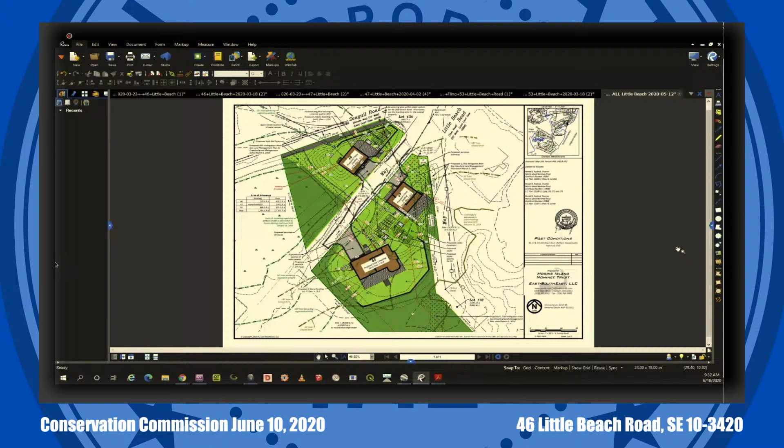So the proposal with 46 is to elevate the structure. We are pulling a little bit away from the vegetated wetland. Underneath the building, we are taking advantage of the space and putting in a garage, which will be a prime location for refuse, the equipment that can be stored within.

We're proposing a deck located to the east of the property, away from the wetland. There'll be a new Title V septic system that better meets the requirements. And there will be mitigation that is equivalent to the 2-to-1 requirements.

Looking at 47, this was a bit more difficult of a lot because 47 is extremely small. The current building actually exists over the property line. We're pulling it back onto the property, just barely.

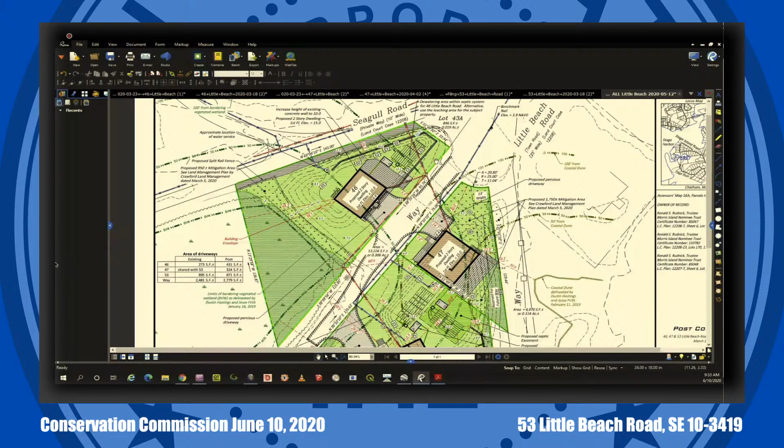We're choosing to mitigate in front of the property because there's really no room on the other sides. That's where the septic system currently exists, but we're going to put an easement on the 53 lot for that septic system so that it's in the best location possible.

With 53, this is the largest lot. This does go out to the water. Again, proposing to elevate the garage underneath, the septic system that is higher, therefore better.

This mitigation is coming in the form of a land management plan. It's removal of black pine and knotweed. And then going back into the middle, we are shifting the driveway over as far as we can away from that BVW. That will all be pervious surface, and all the grading is established to keep the water away from the wetland.

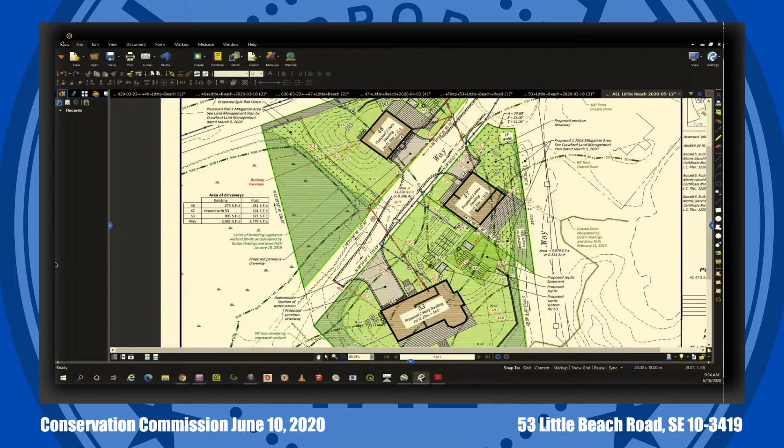As mentioned, the numbers, we're reducing lawn and reducing non-native invasives in order to make up for the slight increases in coverage. FEMA compliant foundations, which is a bit better than the current foundations that exist today. The decks would be open and as pervious as open decks can be. And if there are any questions, I'd be happy to answer them.

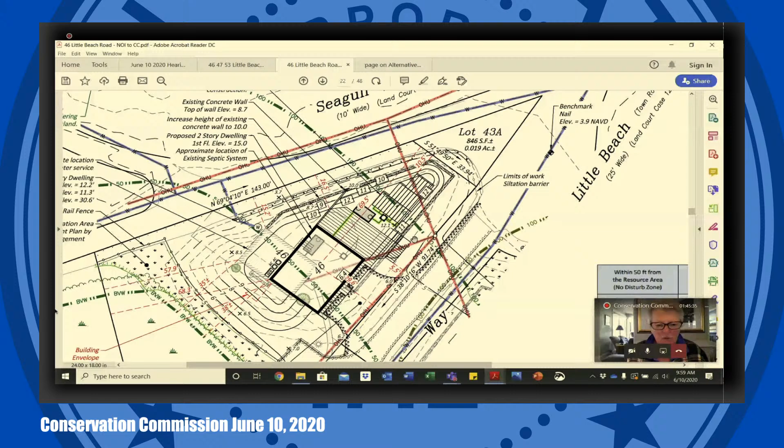The green area around the dwelling, that's just basically Cape Cod lawn? Yes.

The AC units are showing as being in the no disturb zone. Is there any reason they can't be moved to the other side of the dwelling to get them out of the NDZ? They are in the NDZ, and they're also elevated. Those have to meet the same requirements as the building, so we need those AC units and the generator up at elevation 14, or at least 4 feet above the ground.

Is it possible to move the AC units and their elevated position to this side? Yeah, anywhere along there, just to improve the no disturb zone, which is already disturbed, I know, but...

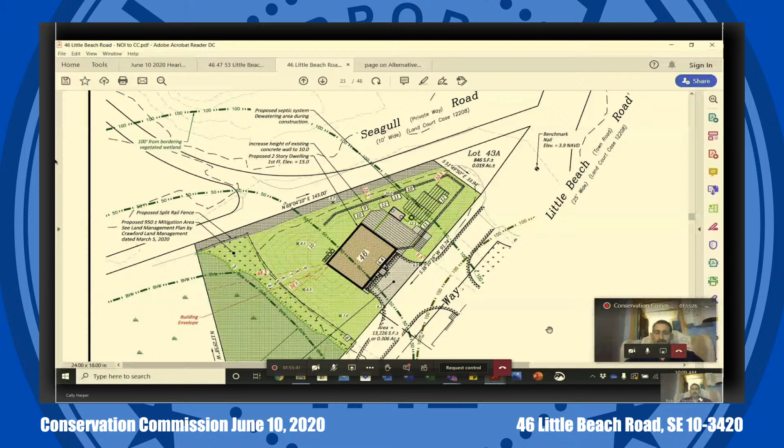I have a question about the proposed mitigation. So the proposal is to treat and remove all invasives, likely invasives, and non-native plant species from the property. My question is, does that include the portion of the isolated wetland that is on site? And how would you propose to do that, to work in the wetland on only a portion of it and leave the rest?

This is Jen Crawford from Crawford Land Management. The answer is yes, we would propose to manage those species in the portion of the wetland that is on the property, and you'll see on the plan that the property line goes through the wetland, through the majority of the wetland on the property. I recognize my labels, hatches, and legend are flip-flopped, but when you're looking at the plan, the grass symbol where it says low wetland vegetation, really the only thing in there is purple loosestrife, which is very easy to manage.

There are more invasive species around the edge of the wetland in that mixed shrub border - everything from shrub honeysuckle and bittersweet, but it's also mixed in with baccharis and a bunch of Rosa palustris, swamp rose, and some good things in there. So it should be pretty easy to just go through those areas and clip and drip anything that doesn't belong.

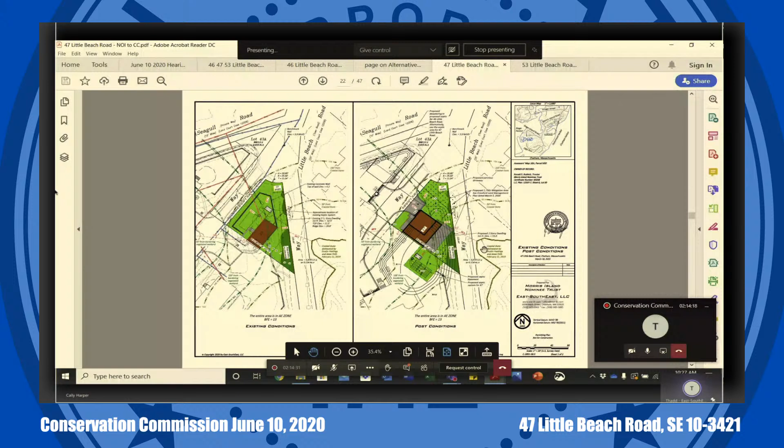Okay, so to the east of 47. Right, that was a way established as a means to the water. And just to share, Morris Island Road used to go through here. This was the way to Morris Island Road.

They now have a 20-foot wide way there that contains the path, which is of benefit to everyone in the neighborhood to get out to the water. They had reserved a 13-foot strip for a future way, and we are proposing deck and stairs within that, with the risk that should they ever improve this to be a formal road going out to the water, they will have to remove that. But getting approval to have a formal way, anything more than the 4-foot wide path they currently have, is slim to none.

So who's responsible for maintaining whatever is planted there or any other activity in the way? What entity controls the way? I don't know how else to ask the question because I don't understand.

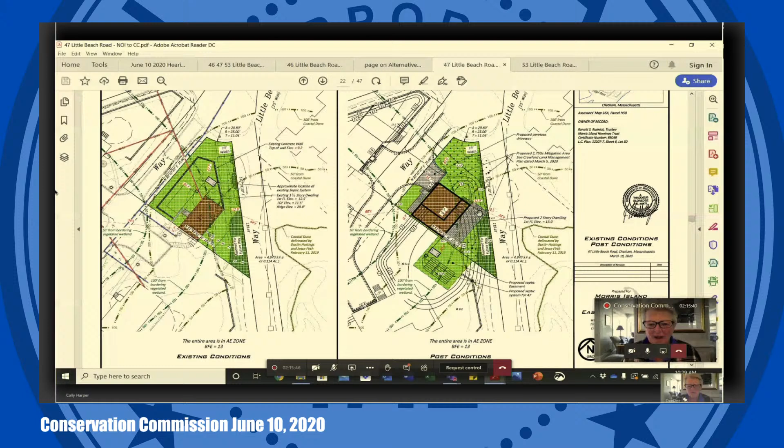It's a private way that a number of people have rights in. Under derelict fee, half the ownership would be under the applicant, and the other half would be under Mr. Eaton and company. But responsibility? Excuse me, Madam Chair, I think that's wrong about the ownership. Oh, my mistake.

We have a derelict fee statute. So when ways are created on a plan, the adjoining property owners go to the middle line of the property. So the Eaton property, which is on the other side of the way, would own to the middle line, own the fee to the middle line, subject to the rights of all persons to use it. And then we'd have our interest in the reserved future way.

So within that way, there is a 4-foot path that the residents use, is that right? That's our understanding. I don't know who has legal rights to use it, but in general it's used by everybody. It's more like a little footpath that goes through some native grass areas and then into the dune. It's probably only about 18 inches wide at the most, just a little footpath that goes through there.

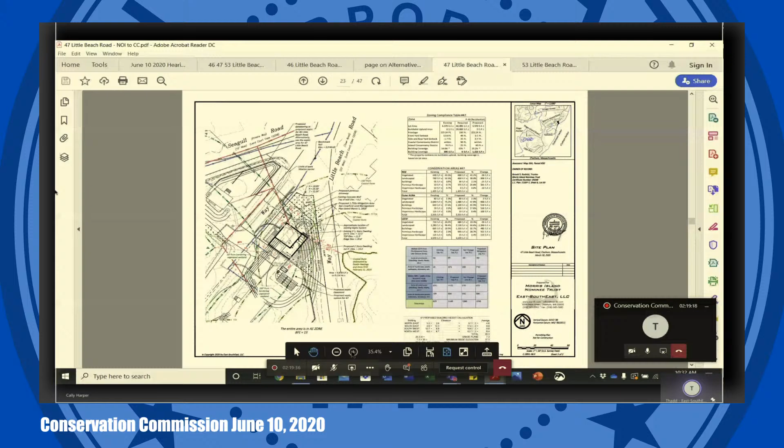There is a line on the plan that usually designates, I thought, a top of coastal bank. It's a straight line with little triangles. Oh, that was a topographical line just showing a change in slope. This is the site plan. So when we perform topography, we generally locate changes in slope, and that's the line type that comes in. When we designate it as true coastal bank, we will bold that line. So it really doesn't mean anything other than there's a change in slope there? Correct. And below that there's another one with little triangles going the other way—just a slope that exists there so when we contour the property we can use it properly. We usually take those out, but I guess we left that one on.

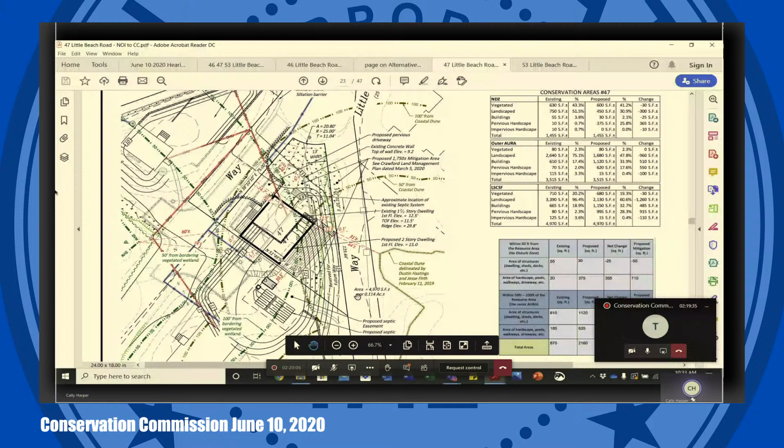Other than mitigation questions, any other non-mitigation questions on 47? I have some, but I can wait till after the commissioners. Hearing none, go ahead, Callie. I have a question, sorry Jan—Bob, I'm always cutting you off. I apologize. That's okay, sorry.

On the material for the pervious driveway, what is that going to be? It just says pervious driveway—stone, shell, or stone and shell? That's all I had.

Thad, same thing for the alternatives analysis for this project—can you beef those up? And I saw some missing performance standards for the adjacent upland resource area, can you add those in? And two more things: as we're talking about the decks and what's going in underneath, is there a possibility to add a generic plan note to the site plan for at least 46 and 47, stating that gravel would be placed underneath the deck? And lastly, could you explain how the project does not interfere with the landward or lateral movement of the coastal dune?

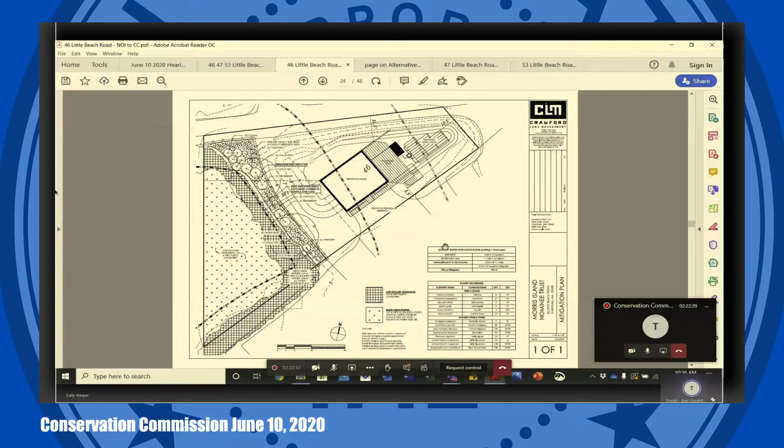So there's nothing stopping the dune from coming over and expanding underneath the building on the southwest side, and there's nothing stopping it from expanding northeast of the building. But otherwise, when the dune does build to that point in many years, the dune would be able to expand around the building.

And then same for 47, if this dune line started to move more landward or expanded laterally, potentially, given the elevation of the home being outside of the floodplain, that would give more room for the movement of the dune in many years to come. It would be fine. Okay.

And I think you'd see that the landward extent of that dune is really going to be cut short by the walking path. Yeah, it sounds like the walking path might be one of the first areas to be, for lack of a better word, inundated with sand if that happens.

Well, the walking path has been there for 50 or 60 years or longer, since the Horn family developed this property, actually beginning in the 30s. So I think it might be worthwhile talking about 47, given the fact that in 60 years it hasn't made it across the way, and there's been no dynamic movement as it has been up further to the north by the Beach and Tennis Club.

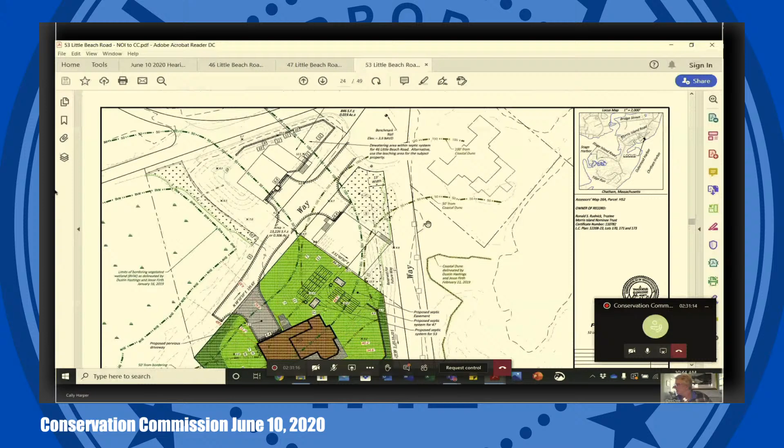I take that back. If you look at the plan I'm looking at, which is the site plan for 53, the boundary line for 53 runs along the way, and it comes down and joins an angled line that runs into the BVW, and that's the portion. So everything above the line towards the street is actually owned by 46, not 47. One of the plans I have shows all three properties, and 46 comes all the way down to that line.

I have to say I've noticed, Thad, you had it up earlier, that there is an existing plan that encompasses all three properties. Could it be possible to get a copy of that, so I don't have to sit here with my scissors trying to cut things and put them onto a board to see them together? Thought we had sent that in, but I'll get that right over. Great, thank you. It's a plan just for reference, called post conditions, 46, 47, and 53 Little Beach Road.

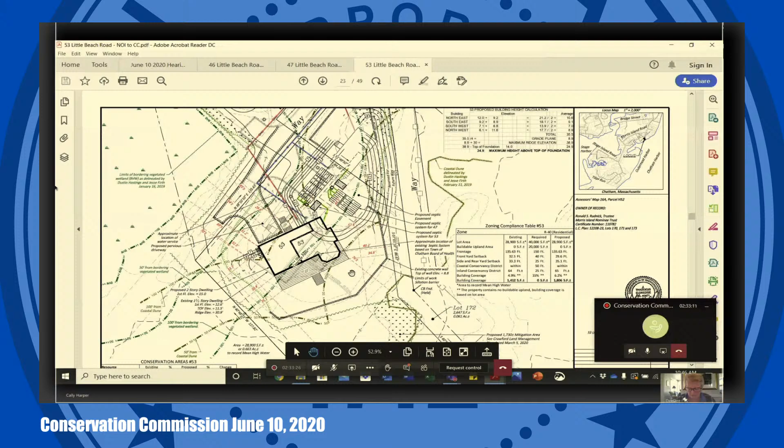I have just another question on the septic easement. Is that a physical line, or is it just an easement for a purpose rather than a physical space, if that makes any sense? Yeah, what's drawn is when we do an easement like this, we do a sketch plan that gets recorded with the easement document, and that sketch plan would follow that dashed line around. But no, there's no physical barrier there. Okay, thank you.

Is that it, Dee Dee? Oh, and it doesn't appear that there's much regrading going on this property, is that right, or did I miss something? There's a little bit of cut in the front with the garage, but otherwise it's over the septic system. We would be looking at adding fill there so we can get those septic systems high and dry, and then just cutting out an access to get into the garage.

And again, what's the elevation above grade of the deck and what's underneath the deck? So the deck would be the same elevation, 14.5 feet, and underneath you're looking at 9 feet, so you have a good 4 to 5 feet of space under the deck. Okay, so that's gravel again, or whatever. Sure. Okay, thank you.

Other questions from other commissioners? Janet, I got a question. Yes, Bob, go ahead. I have the same comment about the retaining wall, I just wondered if that could be softened with some plants. There's a healthy amount of vegetation on the seaward side. Yeah, I was just going to say the same thing. The retaining wall on 53, the only way you can see it is if you're out in the dune, and there's actually all naturalized vegetation pretty much in front of it.

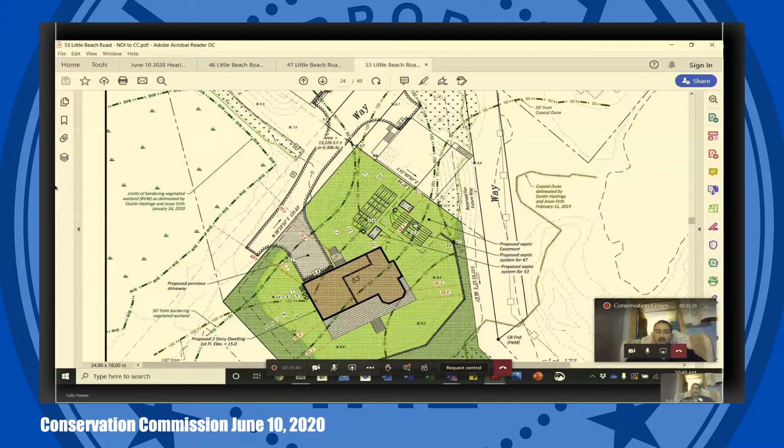Okay, and then I just had another question on the driveway, getting back to the driveways. They're going to be shell or a mixed shell with stone. Is there going to be an apron along the street? Like a paved apron? No, because the street's not paved, just a dirt road. I see, so it's not necessary then. It would be a little incongruous. At Little Beach Road at the cul-de-sac there is already an apron, but that's the only one that we'd have. Right, okay, thank you.

Janet, real quick, I just wanted to follow up. 53, just as a reminder for the updated alternatives analysis, adding the note about the gravel under the deck, and to submit the planting plans, which were apparently submitted but didn't make it into the PDF for 47 and 53 Little Beach. That's all I have on that end. Okay, thank you. I've already emailed you the planting plans. Okay, perfect, great, thanks Thad.

Okay, other questions, any other comments? I think a lot of any lingering questions I still have will probably be answered at an on-site.

One question I have is, where are you with ZBA on this? We're scheduled for July 9th, I believe. Okay, so it's all filed and. Yeah, we got it filed, so it would have been heard like last week. It was supposed to be heard last week, and because this clearly very much involves conservation issues, we didn't want to go through the zoning thing without first coming through you. Okay.

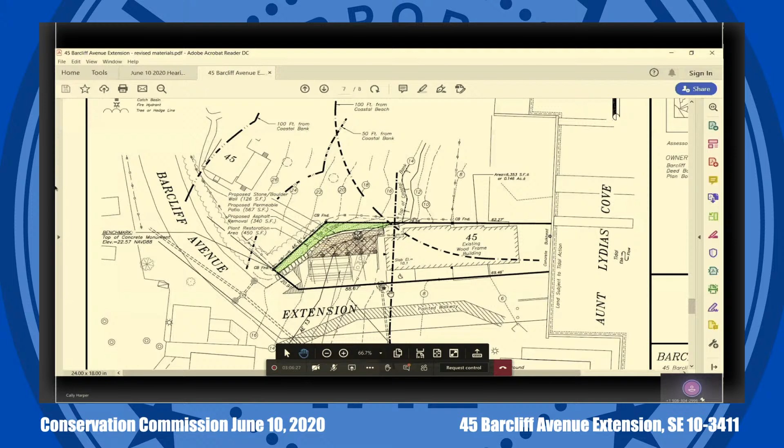Okay, like 6 inches or? I think it would be minimally raised to, the key would be to avoid a trip hazard, have it be high enough to be noticeable, but not higher than necessary to protect the plant and retain the soil behind it.

Okay, and will that be a different color than the patio, or identifiable to someone so they don't fall into it? It may be made out of the stone that the wall's made out of, I'm not exactly sure what that material is. That's between the landscape contractor and our client. I did not spec the material. I think it's wise that there be something to differentiate it. I'd prefer visually to see it be stone as opposed to the paving material.

Okay. Thank you. Commissioner Holt, I have one other thing I forgot to mention. Joyce's Deschampsia, is that native to this area? I didn't hear the name. Deschampsia? You're planting 50 of the ornamental grass? Yes, absolutely. Okay, thank you.

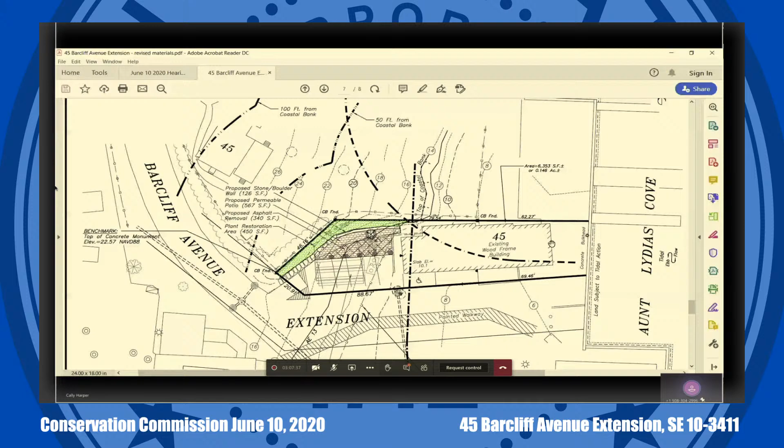Anything else, anybody? Last call, questions, comments? Cally, anything? I think at the hearing on May 27th you had asked for some monitoring. I have a very sketchy note, so I apologize, about some monitoring or reporting from Joyce or whoever's doing the work. Is that something we could just include in the order, that requirement? Yeah, okay, yeah.

All right, so with that, are we ready to schedule this to continue it to the work session on July 1st for approval of an order of conditions?

Commissioner Holt, I'll move that, so moved. Okay, second? Clark seconds. Thank you.

Roll call vote to continue this to the work session on July 1st for approval of an order of conditions. Ms. Holt? Aye. Mr. Kitts? Aye. Mr. Ralls? Aye. Mr. Del Vecchio? Aye. Mr. Clark? Aye. And chair votes aye, so we continue to July 1st work session.

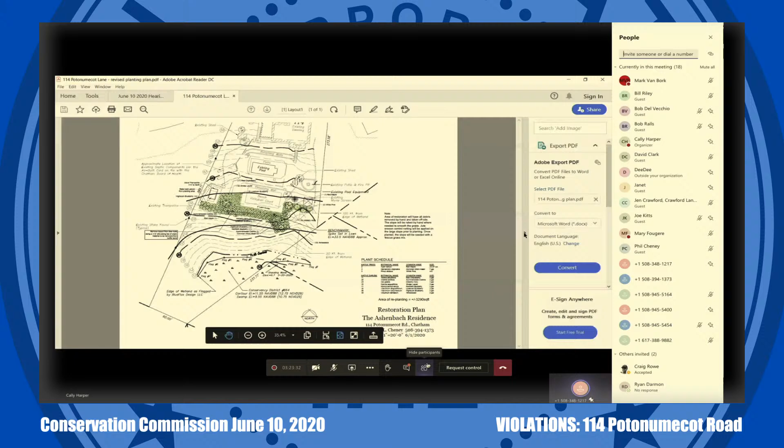Okay, thank you. Do you want to pull up the plan? Sure, I'll do that. Okay, it's up. Phil, are you there? Yes, I am here. Do you have me? Yep, excellent.

What I did is take the plan from previously where we were working on the bank and restoring those areas, removing the brush, and replanting spots that were erodible and had been covered with brush. We've expanded that planting now to remove much of the lawn area around the volleyball court and the trampoline, getting as much vegetation restored back to the 100-foot line where we can. We also saw there was room to move the trampoline back from its current location about another 4 feet, enabling us to plant more on the wetland side. We tried to maintain a 6-foot lawn border around the volleyball court for practical and safety reasons, so it can still be used.

But we've restored everything else possible in that area. It's shaded in green, from behind the movie screen all the way down the bank and along the top of the bank, the volleyball court, and up to the 100-foot line between the trampoline and volleyball court. To be clear, if you haven't seen the site, the movie screen area may look like a lot of structure, but those are just wooden braces hardly interfering with the 100-foot line, and the vegetation around them is growing up nicely, so I don't see any issues there. I also included a note with an arrow pointing to the other side, the boxed note with the arrow.

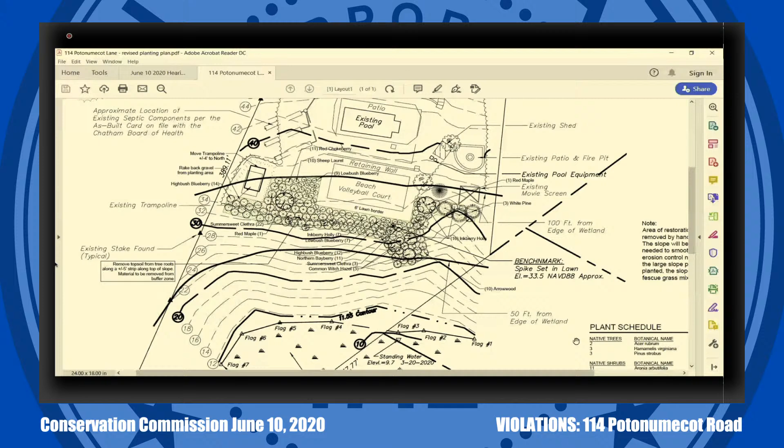Is there anything else you would commonly use besides grass? I think what we've seen in some places is when grass is planted in between, typically in a mitigation area, it ends up being weed whacked or mowed, so it's maintained as a lawn. It's not allowed to naturalize. With the density of the shrubs going in there, that would be really hard to do. I mean, these are all 4 to 5 feet on center. You'd really have to be a master with a weed whacker in there.

I've seen situations like you've talked about, and that'd be cases like where I've seen high bush blueberries planted like every 10 feet or something, and people mowing all around them. But this is densely planted, 4 to 5 feet on center. You'd have to be really determined to get in there with a mower.

If that's sufficient for the rest of the commission, then. We'll have the usual kinds of annual monitoring reports during the 3-year period during which those plants are growing, to make sure the grasses are not being cut during that period. And presuming Phil is right, at the end of that 3-year period they will have grown to such an extent that it's not feasible to get in there anymore. But of course, we can make it a continuing condition to leave it to naturalize.

And certainly, for this and for the future, if the commission had a recommendation on some other material that would grow and not choke out the shrubs being planted, I'd be happy to entertain that. But I found that this is what typically grows in the understory in these open sites, and is good ground cover, good erosion control, while things are getting established.

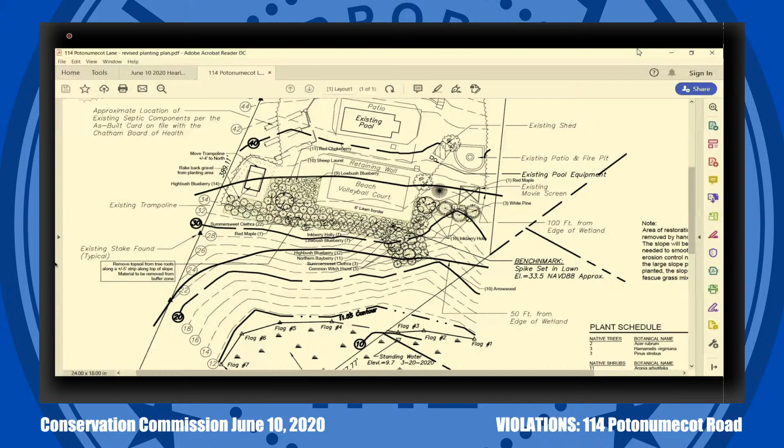Is there a motion to continue to July 1st? Mr. Holt, so moved. Tom, second. Roll call vote to continue to July 1st: Ms. Holt, aye. Kitts, aye. Ralls, aye. Del Vecchio, aye. Clark, aye. I vote aye as well.